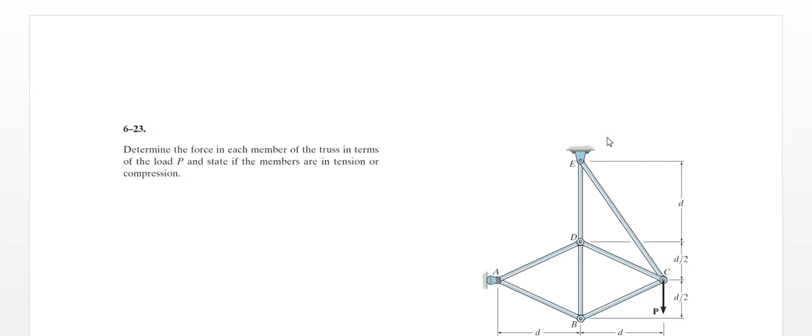I had a request to work through problem 6-23 on the method of joints, so we'll pick up here and go through that. So we have the drawing or the sketch of what that looks like here. We have our frame or truss here, with load P acting at point C in the downward direction, and these distances D and D over 2.

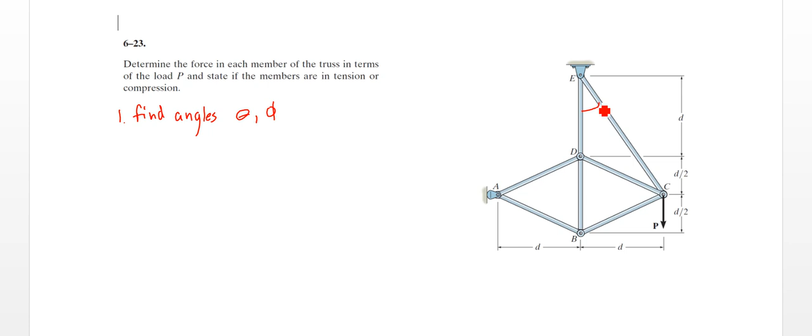Let's get started. Step 1: find angles theta and phi. I'll call this angle phi, and with a dashed line through the middle, I'll call that half angle theta. My second step will be to find reactions at A and E. Taking equilibrium of the whole truss, what are the reaction forces at E and at A, and then we can use those in our method of joints. Step 3: use method of joints to find tensions. We'll have to do that at multiple joints, perhaps all of them, perhaps only 4 of the 5, but we'll work our way through.

So let's get started. If we take theta, we know this half is going to be D over 2, and this length here is D. So step 1, find angles. With that information I can find theta. Tan of theta equals opposite over adjacent, equals D over 2 over D, so our D's cancel. So theta equals arctan of 1/2, which is 26.6 degrees. And then we can do the same thing for phi.

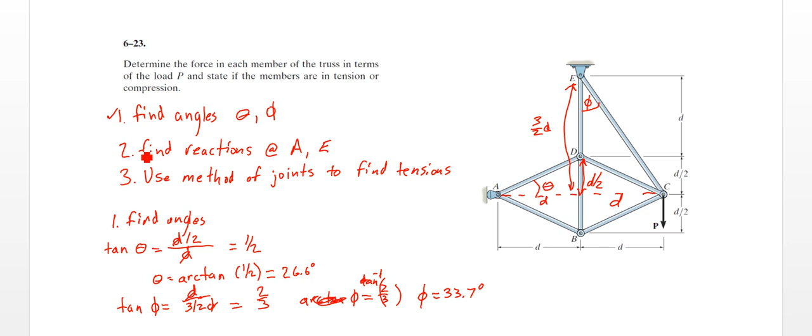So we've got step 1 done. Now we're going to find the reaction forces. Remember that the whole truss is in equilibrium, so the force P at point C has to be counteracted by other forces at E and A. So at A, let's take a look at this.

What kind of reaction can we have here? We have sliding contact, so we can only have something normal to this, so our normal at A is only in the x direction. At E, I'll tip my hand a little: if A has to be going this way, it can't really be pulling into the wall, so my reaction force at E in the x direction is going to be that way. And if I'm pulling down at C, I need to be pulling up some amount at E in the y direction to counter that P force in the negative y direction.

So how am I going to find what those values are? Well, we can do the sum of the x components has to be 0, we can also do the sum of the y components has to be 0, and we can also do the sum of the moments, and I'm going to pick around E has to be 0. And why did I pick E?

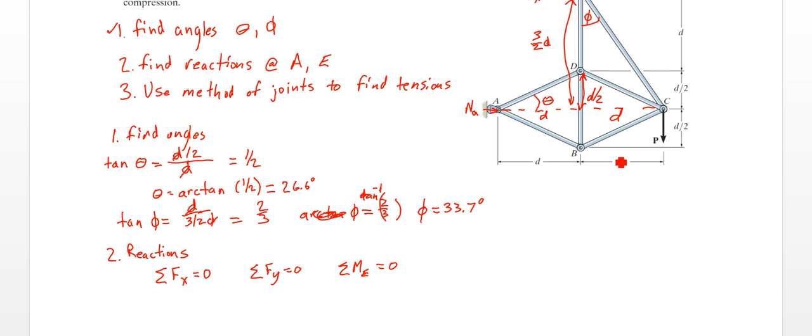Well, if we're only solving for our reaction forces, this creates a moment around E, and I know this one, and I don't know these two. Since I picked E, these create no moment at E, so I have two unknowns there, but I can isolate those and only have one unknown, this normal force at A, with my P creating moments. So let's start with that one.

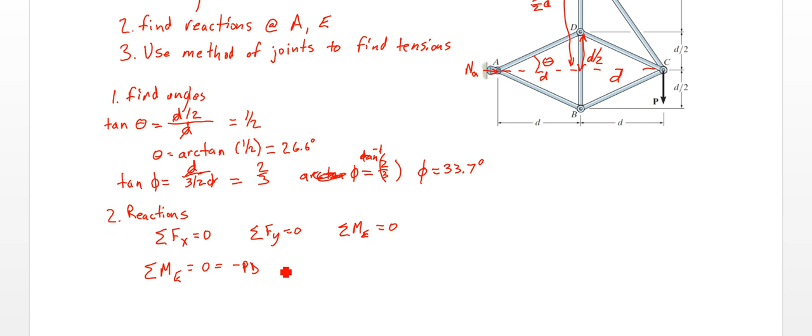So the sum of the moments around E equals 0. I'm going to have P times D - what kind of moment is that going to create? It's going to make clockwise rotation, so negative PD. Then at A I must have a positive, right? So plus my normal force at A, and what's the moment arm for that? It's going to be D plus D over 2 gets me to this A, so I'll just call that 3/2 D, and equals 0 on that side, so PD equals NA times 3/2 D.

My D's can cancel out - those are the same D. I should have both made them lowercase. So NA then, dividing both sides, or multiplying both sides by 2 and dividing by 3, gets me 2/3 P for my reaction force at A.

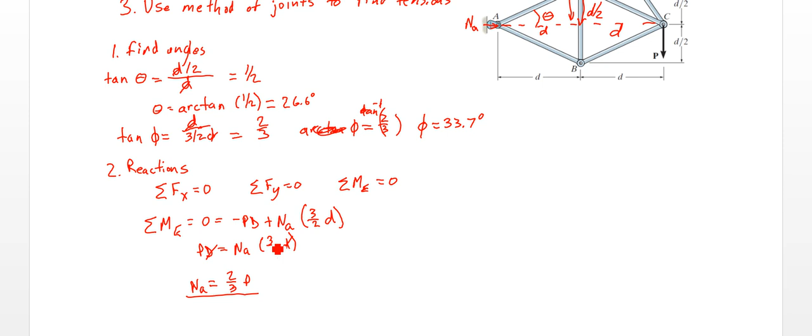Alright, so there we go. Let's take the sum of the forces in X then. Sum of the forces in X equals 0. So I have 2/3 P plus force at E in the X direction equals 0. Force in the X direction at E equals negative 2/3 P.

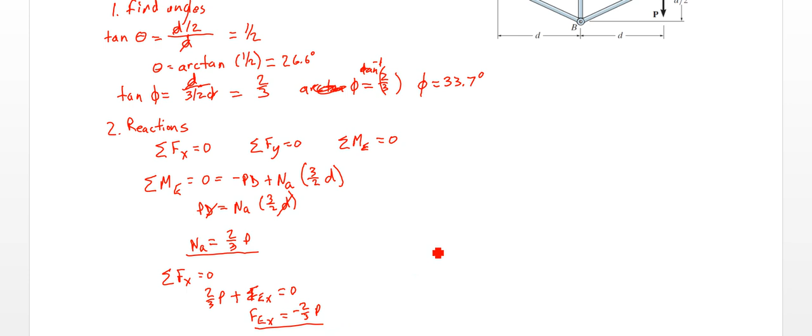So there's that part - my X components cancel each other out, and then the sum of the forces in Y equals 0. So I have negative P plus force at E in the Y direction equals 0. It's pretty obvious then the reaction force in the Y direction at E equals P.

So we have those three - alright, so there's our reactions. So we can check that off, and now we'll do the method of joints. So we'll start at joint E, that's where we know the most amount of information, right?

So we now know FEY and FEX. What we don't know is tension in CE - I'll call this CE, I'll call this DE. Here's CD, here's BC, here's BD, AB, and AD. Alright, so I don't know DE or CE for joint E, but I do know FEY and FEX. So I will start at joint E and work from there. This is step 3, method of joints.

So I'll start with joint E. I'm going to draw a free body diagram for that. So here's E, I've got FEY here, I have FEX there, and I'm going to assume everything is tension. So I'm going to be pulling on all my joints until I've proved otherwise that that's in compression. So if I find a negative sign, that means my force is the correct magnitude, but it goes in the opposite direction, meaning that member is in compression.

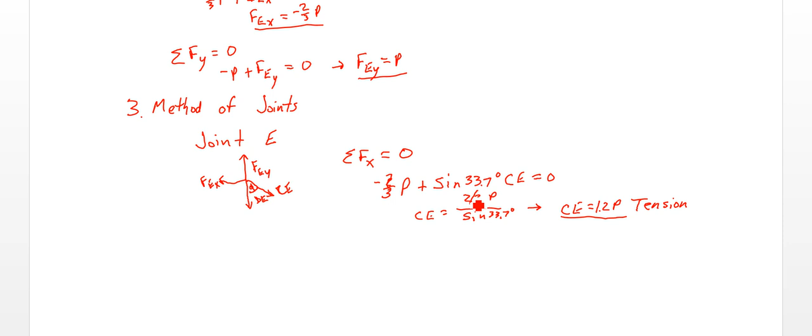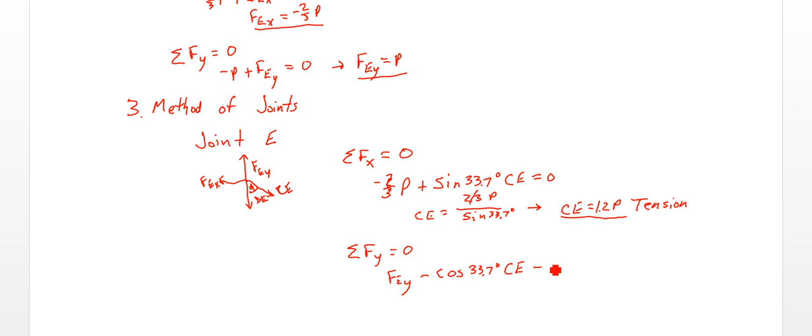Sum of forces in Y equals 0. So what do we have? We have FEY minus, what is the component here of CE? It's going to be cosine 33.7 degrees CE, and then we're going to have minus DE equals 0.

So filling in the values now, we have P minus cosine of 33.7 times 1.2 P minus DE equals 0. I'm going to slide my DE to the other side. It's P minus 1.2 P cosine 33.7.

And when I fill in values for that, cosine of 33.7 is going to be pretty close to 1. Turns out that DE equals 0. So it's a zero force member.

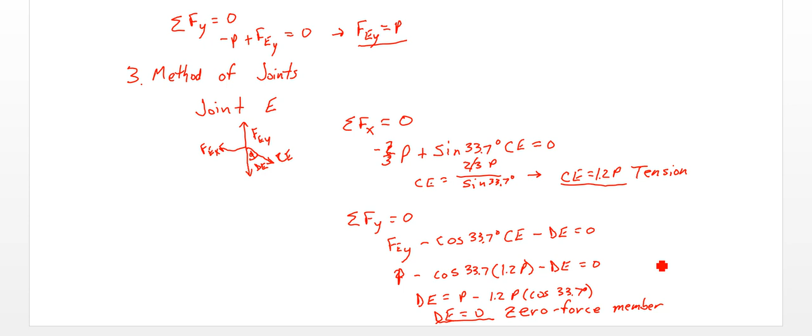We couldn't tell that from our rules just looking at that. We had a reaction here, we have some load here, it's collinear with BD. You would think that if there's one member coming off of that, that one member would be zero force. In this case, none of those rules would have helped us figure out that DE is a zero force member. So we did a little extra work to find that, but it wasn't wasted because there wasn't a way to determine that otherwise. So we're done with joint E.

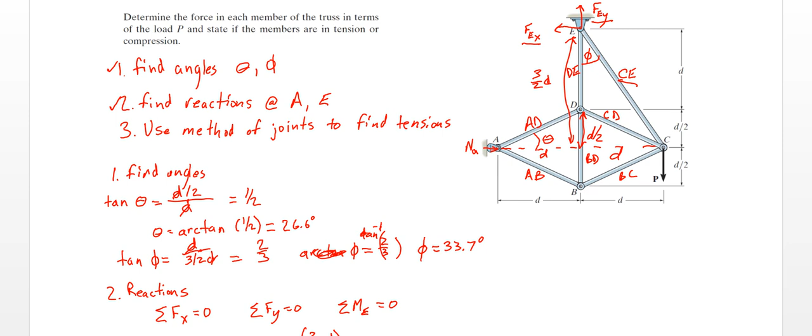Let me zoom back up for a second. So we're done with joint E. Now we know CE, we know point P here. So let's move on to joint C, where we don't know CD or BC. We do know CE, we do know the load P, so then we can find CD and BC. That was a mouthful. All right, moving on to joint C.

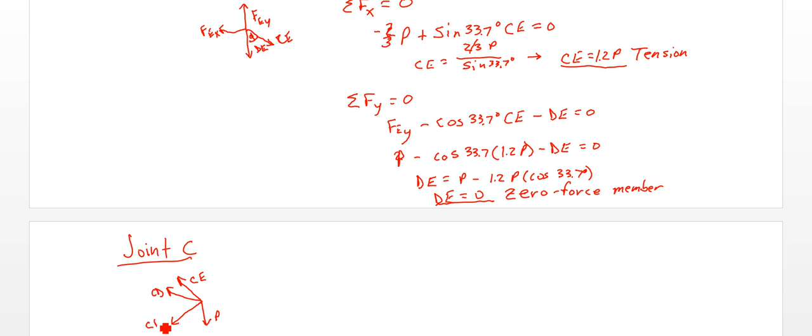So joint C, what do we have here? Let's draw a little free body diagram of that. So we've got P coming down. We had CE was in tension, so it's going to be pulling on our joint. That's not quite the right angle, but we'll go with that. I'm going to assume this is in tension. This is CD, and this is CB, also assuming that's in tension. So that's our free body diagram of that joint.

So what are, and then again, this is going to be our theta, this is also theta. This one up here is, let's see, what do we have there? We've got, from horizontal, this is going to be 90 minus phi. But we could also look at that from cosine sine of our other angle there.

So let's do that component of things first. Sum of the forces in Y equals 0. What do we have? We have negative P plus, what do we find for CE? For CE we had 1.2 P, and then what are we going to have there? We're going to have times the sine of 90 minus 33.7. This thing we can make it into cosine of 33.7. Sine and cosine will be the inverses of each other there.

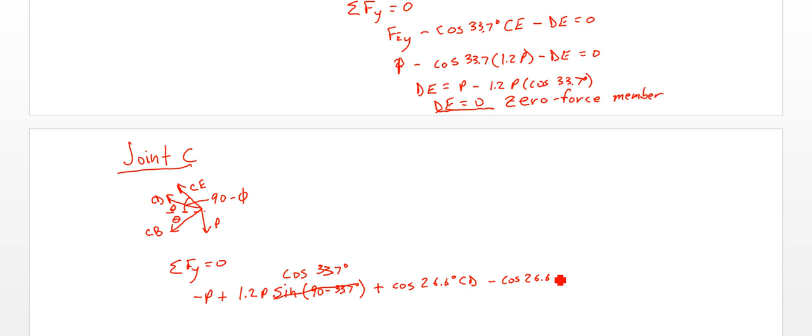And so that's those two things that we know. What we don't know is, so we'll have plus cosine of, what was our theta? Theta was 26.6 degrees, CD minus cosine 26.6 degrees BC. So this part is going down, this part's going up. That's the difference in sign, equals 0.

So we'll fill in our values here. So we get negative P cosine of 33.7, times 1.2 is positive P. So then we have, those cancel each other out. So we just have cosine 26.6 degrees CD equals cosine 26.6 degrees BC. So it becomes pretty obvious then that CD equals BC.

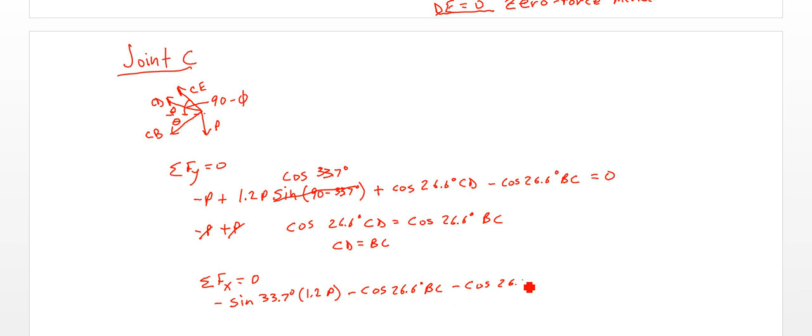Alright, so then we can use sum of forces in X to find what that value is. So in the X direction, we're going to have negative sine of 33.7 degrees times 1.2 P. That's our CE component in the X direction right here. And then we're going to subtract off cosine 26.6 degrees BC minus cosine 26.6 degrees CD equals 0.

So it's pretty obvious that one of these, or maybe both of them, are in compression, so we have all negative signs. So sine of 33.7 times 1.2, that gets us 0.6658 P. Now pretend I moved that to the right and flipped everything around.

Equals, and since BC and CD are equal to each other, equals negative 2 cosine 26.6 degrees BC. So BC equals negative 0.6658 P over 2 cosine 26.6 degrees. If I do my math correctly there, I get 0.3723 P, and that's negative, so that gets me a compression member.

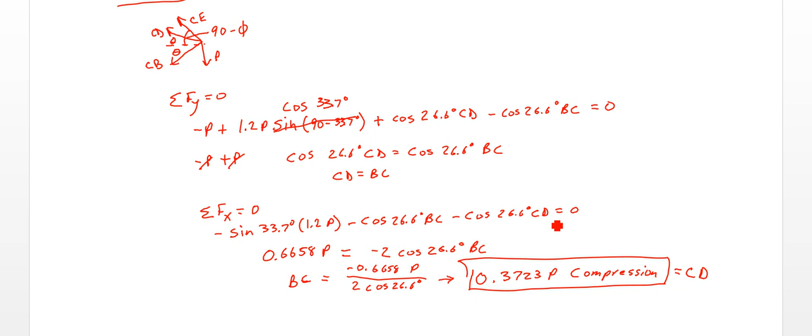And that also equals BD, so I'll just put an equals, not BD, excuse me, CD. That also equals CD. Alright, so let's take a look at our sketch again. We found CE, now we found CD, we found BC. Where should we go next? We also found DE, I guess. Let's go to joint B next.

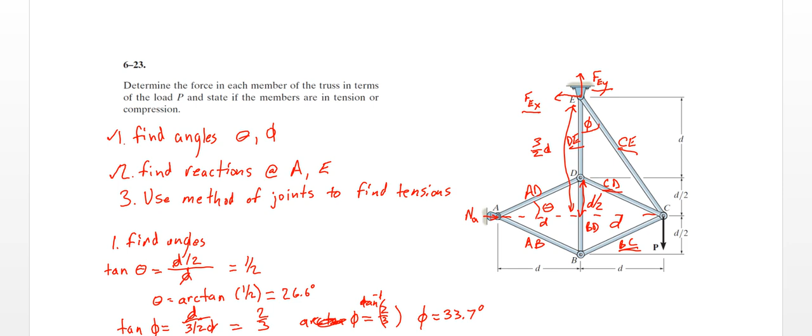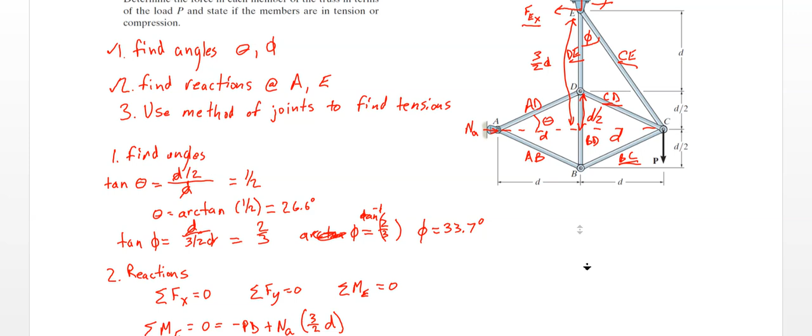So we have this component that we know, we don't know this or this, so we can find those. We have two unknowns, so we can have two equations of equilibrium. So look at AB and BD along with BC. So we're going to move to joint B. So what do we have there?

We've got this point down here, that's B. So we have BC pushing on it. It's a compression member. So there's BC. We have BD. We don't know its sign yet, so I'm going to call that a tension member pulling on it. And AB we don't know, so I'm also going to make that a tension member.

So we'll do the sum of the forces. I'm going to do X first, since this BD component has no X component to it. Sum of the forces in X equals 0. So we have negative cosine 26.6 degrees BC. That's that X component that would be acting here. And then we'll have negative AB cosine 26.6 degrees as well. So that's a symmetric triangle down there, equals 0.

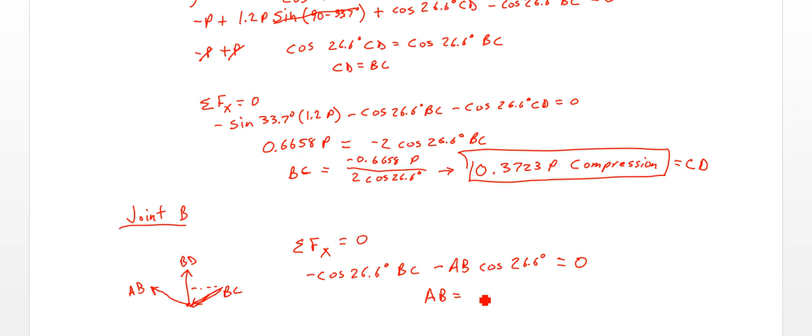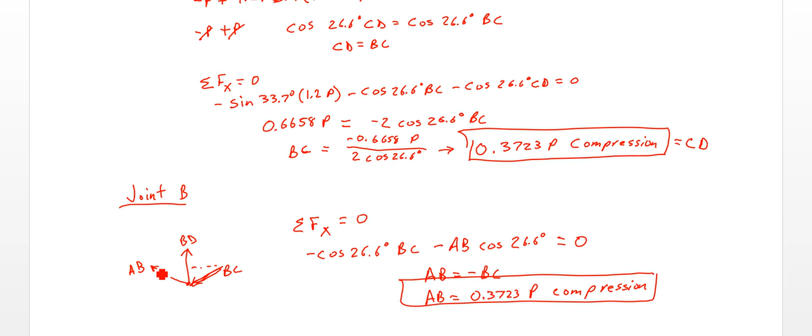So we'll move AB to the other side. AB equals negative BC. So AB equals 0.3723 P, and that's also in compression. Alright, so we've got that, so we could actually switch that sign around. So it should be pushing in this way.

So our sum of our forces in Y equals 0. So what do we have there? We have negative sine 26.6 degrees BC minus sine 26.6 degrees AB plus BD equals 0. So BD equals, and since AB and BC equal each other, we're going to have BD equals 2 sine 26.6 degrees AB. Filling in those values, we find BD is 0.3333 P, and that is a tension member since that came out to be a positive sign.

Alright, so we've got that, and now last we can do joint A. So at joint A, what do we have going on? Here's our joint. We have this normal force, that reaction at NA. We had AB was in compression, so it's pushing on that joint. So we've got that force here. This is AB. We have AD here. And I'm going to assume that's a tension member.

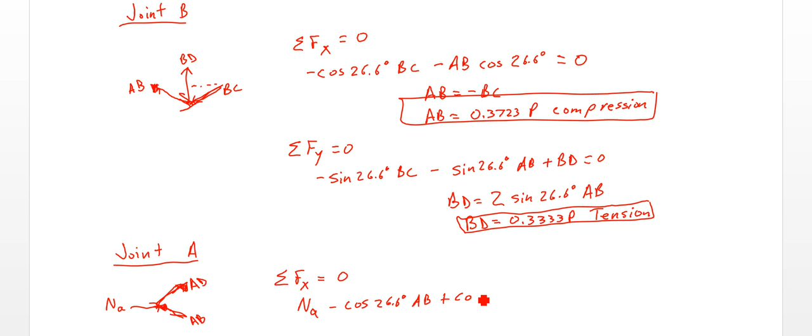So what should we do first here? It doesn't really matter which one we do. We'll do the sum of the forces in X equals 0. Y might be a little faster, but I'll stick with the X. So what do we have here? We have NA minus cosine 26.6 degrees AB plus cosine 26.6 degrees AD equals 0. So what do we have then? NA, let me flip back to my first page. NA was 2/3 P,

and this was negative cosine 26.6 degrees, and AB was 0.3723 P equals negative cosine 26.6 degrees AD. So if we divide this by negative cosine 26.6, that gets us our value. If I do my math there, I find AD equals negative 0.3723 P, so that's in compression.

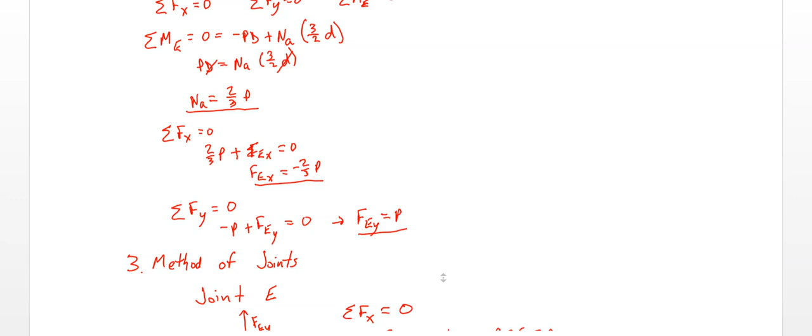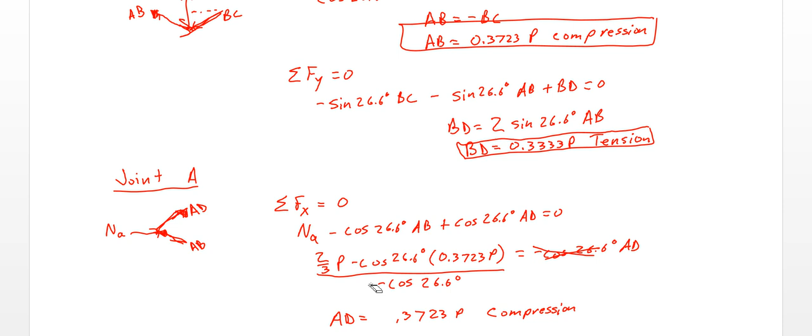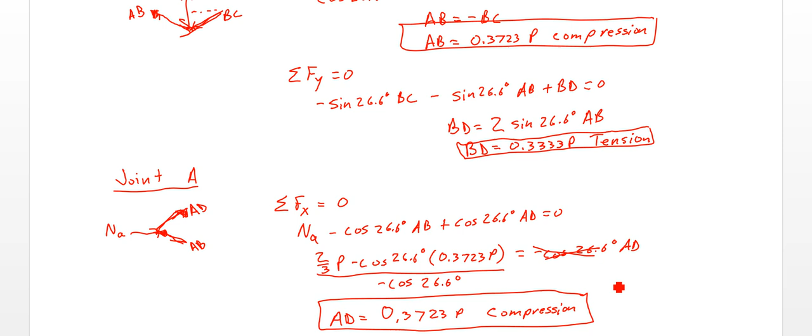So I can get rid of that. Excuse me. So that was in compression. Oh, sorry. That was in compression. So I'll just get rid of that negative sign that I had in front there. So 0.3723 P in compression is AD. So that should finish us off.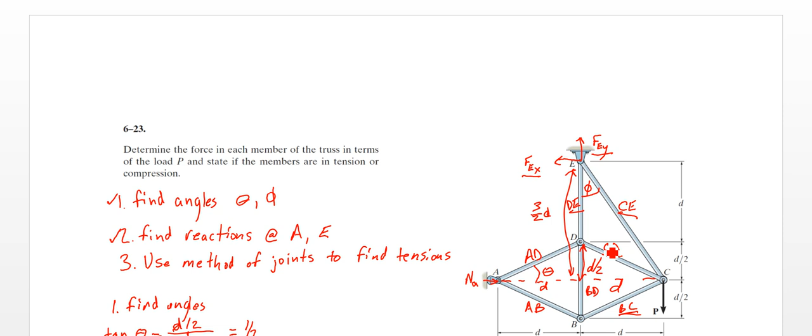So to summarize what we did, came up here, we defined these angles just to make it a little easier in our equations to keep track of what quantities we were looking at. Then we found the reaction forces for the whole truss to be in equilibrium, and then we just started from there and marched our way around until we solved all the members. So we actually didn't solve joint D because we had solved those 3 members using other joints. So we did 4 methods of joints to solve the whole truss.